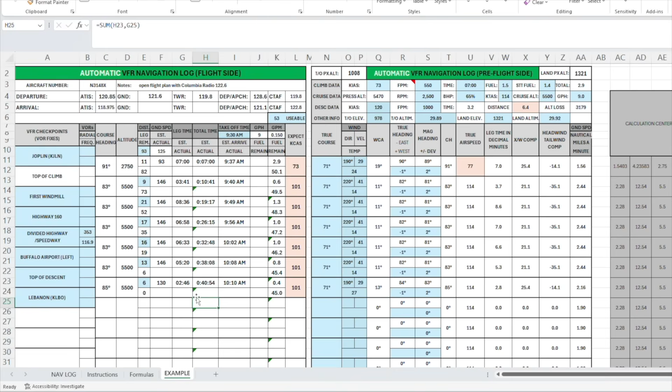Then we have the example tab, and this is actually the finished product from the NAVLOG I'm building in this video. So if you need something to look at, you can come over to this tab and see how I filled mine out.

Now, before I get started filling this out, you're going to notice that I color-coded a few things for you. The blue areas are things that must be filled out, and the white cells are things that will automatically be calculated for you.

There are a few white cells that'll be empty. Some of these are for your personal notes. I know a lot of pilots like a spot for their radio frequencies, so I threw a couple cells up here for those, and then the rest of the blank spaces down here are for your in-flight calculations.

Now, if you're wondering what these peach cells indicate, these are cells you should calculate if you have time, but the automatic calculations provided will get you really close.

For example, your expected calibrated airspeed should really be calculated with a flight computer. But these cells will estimate your calibrated airspeed based on the assumption that true airspeed increases 2% every 1,000 feet of altitude increase. This isn't a perfect calculation, but it's pretty close when you're operating at a lower altitude.

Okay, before we start filling this out, we need to plot our course, so let's go ahead and do that really quick. Today, I'm going to be flying from Joplin Regional, which is KJLN, over to Floyd Jones, which is in Lebanon, Missouri. That's KLBO.

So I'll start by drawing a line between these two airfields. This is what we call plotting our course, and after I do that, I'll use my plotter to determine my true course for this entire trip. I'm getting a true course of 071, or 71 degrees.

Now, because this route is a straight line the whole way, I can just throw that in my NAVLOG here. I'll put it up here on the first waypoint for now, though, because I don't know how many waypoints I have yet. Next, I'll pick some VFR waypoints that are roughly 20 miles apart.

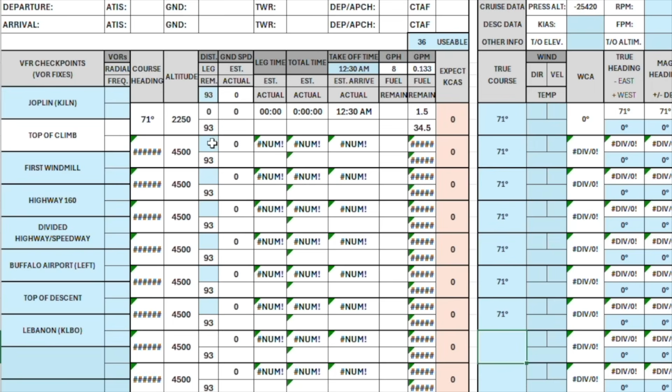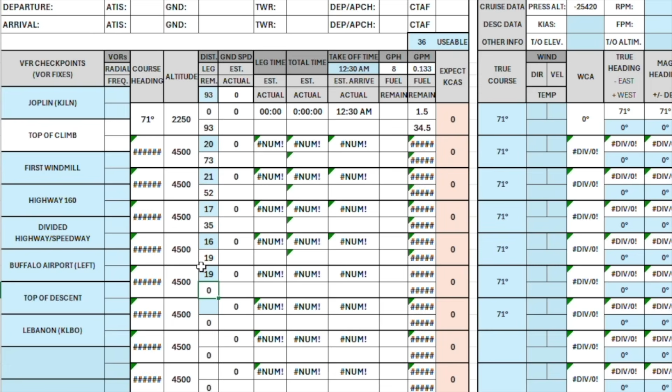I know my first leg is 20 miles, my second leg is 21, the next one is 17, then we have 16, and then our last leg is 19 miles. So I'll go ahead and throw that in here. Keep in mind, we don't know our top of descent yet, so we'll just skip that for now. Now, this sheet adds up these individual distances for you and puts the total down at the bottom of the sheet. So if you're off by more than a mile or two, you might want to remeasure your legs.

Before I move on, I do want to point out that this spreadsheet does have a place for VOR radials and frequencies if you want to use a VOR for one of your waypoints. In fact, if we pull out our map, you can see that our divided highway could be replaced by the 353 radial off of the Springfield Vortac. So I'll throw that frequency of 116.9 in here, and my 353 radial up here in case I want to test out my VOR skills during this flight.

Next, let's grab our performance calculations. Up here at the top of the pre-flight side of our NAVLOG, we've got some blue cells we need to fill in. First, we need the elevation of our takeoff field. According to our chart, it's 978 feet MSL. So let's throw that in here.

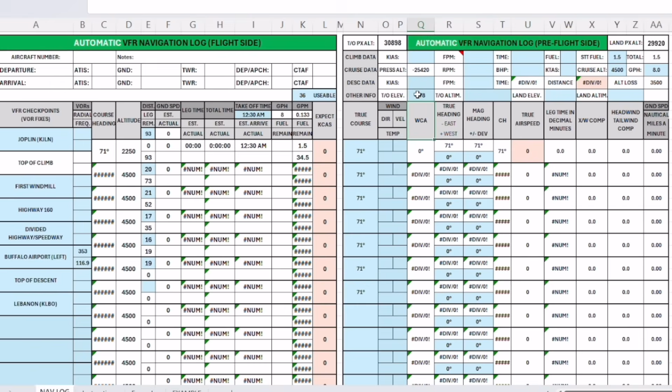Next, we have the altimeter setting at our takeoff field. Let's say we're making this trip as soon as we're done here. In that case, I'll just grab the METAR from aviationweather.gov. It looks like our altimeter setting is 29.9, so I'll throw that in right here.

Then the elevation at our destination is 1,321 feet. So we'll jump back over to the NAVLOG and throw that in here. The current altimeter setting at LBO is 29.9, so we'll throw that in here. And now that we've done that, our spreadsheet has calculated the pressure altitude at both locations.

Now we need to decide something. At what altitude do we want to fly? Anytime we fly above 3,000 feet AGL, we need to fly the proper VFR altitude. If we're flying a magnetic course of 360 to 179, we're on the east side of the compass, we need to fly an odd altitude plus 500 feet. If we're flying a mag course of 180 to 359, the west side of the compass, then we need to fly an even altitude plus 500 feet.

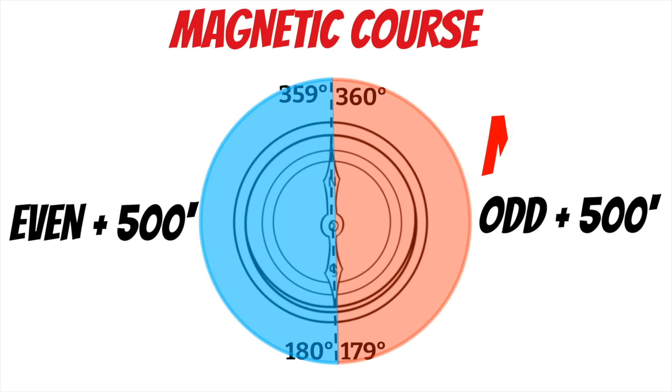I like to tell people that northeast is odd and southwest is even. So you've got ne-odd and sw-even.

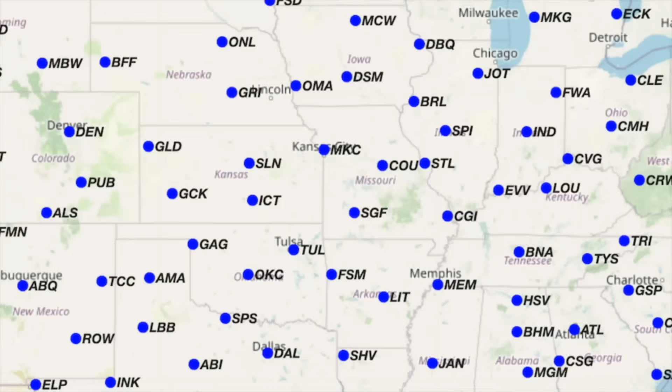This Winds Aloft chart comes from aviationweather.gov, and if you use it, you have to make sure you're using the closest sensor to your route of flight. Thankfully for this trip, Springfield is right in the middle of these two airfields, so I'll find SGF on the chart and grab the wind data for the 6,000 foot column since it's closest to our cruise altitude of 5,500 feet. Looks like our cruise winds are 220 at 41, with a temperature at altitude of 14 degrees Celsius.

Now that we know that, we can come over to our spreadsheet and throw these winds and temps into our blue wind blocks. To make things a little more accurate, I'm just going to put these in the cruise legs for now, not the climb and descent leg.

Once that's done, I like to go back to the Winds Aloft chart and pick a wind column that's about half our cruise altitude for the climb and descent legs. At 3,000 feet MSL, we've got winds that are 190 at 29, and the 3,000 foot column doesn't give us temperatures, so we'll just assume the temperature is the same as the surface to make things easier. We could calculate it, but it won't make much difference for this situation.

Now let's get the rest of the performance information. To fill out this section, we need the Pilot's Operating Handbook for our airplane, or the POH. If your airplane doesn't have one, you need the Airplane Flight Manual. Today I'll be flying a Cessna 172 Sierra, so these charts might look a little different than the plane you're in, but this NAVLOG should still work for you. On newer POHs, the performance information is going to be in section 5, but for older airplanes, who knows? It's going to be wherever the manufacturer felt like putting it.

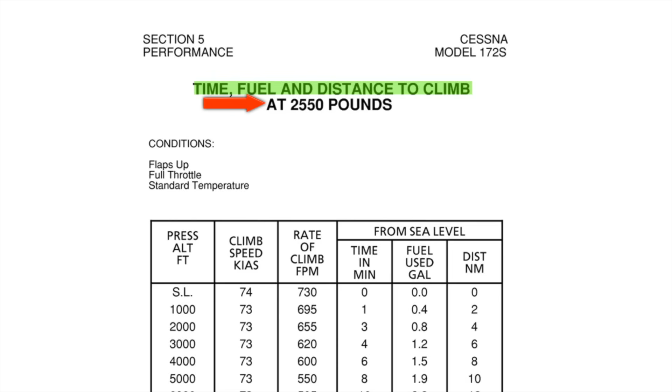Let's start with our climb data. For NAVLOG purposes, you want to find the chart labeled time, fuel, and distance to climb. Some POHs give you charts at different weights, but this one only gives climb data at your maximum weight, so these numbers are actually going to be slightly off, but they're conservative.

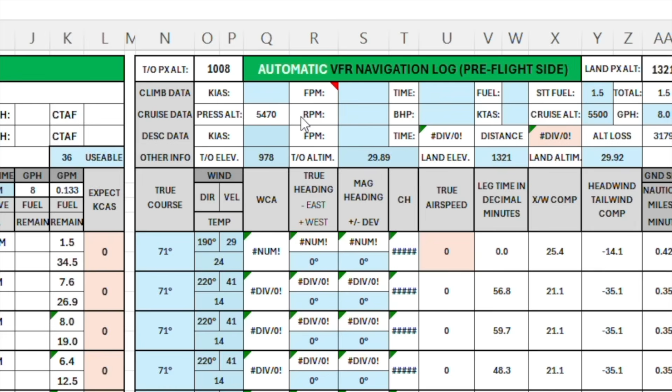Now this chart is a little weird. To properly calculate climb data, we need to know the pressure altitude for the altitude we're going to be cruising at, not the actual cruising altitude. Normally you'd have to calculate this, but because we put our cruise altitude and altimeter setting into the pre-flight side of our NAVLOG, my spreadsheet has already calculated this for us. It looks like our pressure altitude at cruise is going to be 5,470 feet.

If we look back at our chart, you can see we've got data for a 5,000 foot and a 6,000 foot pressure altitude. You could interpolate this data, but I'm just going to round down to 5,000 feet for today. So it looks like we're going to be climbing at 73 knots indicated airspeed, and we'll be climbing at a rate of 550 feet per minute. Let's come back over to our NAVLOG and throw that information in up here.

Now, before we fill in the time and fuel information, I want to show you something. Unfortunately, the climb information in these lines is for a climb from sea level up to our pressure altitude. A lot of people will just use this information directly, but what I like to do is take the information from my cruise altitude and subtract the information from the pressure altitude at my takeoff field.

Let's see here, our NAVLOG calculated that at 1,008 feet. So let's go back over to our climb chart. From sea level to 5,000 feet, it would take us 8 minutes, but we started at a pressure altitude of 1,000 feet, so we basically saved 1 minute in the climb. So our total climb time should be 7 minutes. Let's go ahead and throw that in the NAVLOG over here.

Now, one thing I do want to mention is that Microsoft products are extremely stupid. For some reason, the only way I can get this cell to take the correct time is to input the time in an hour, minute, and second format. So let's type in 00:07:00 into this cell. Now let's grab our fuel.

I'm showing 1.9 gallons for the climb up to 5,000 feet, and we saved 0.4 by starting out at 1,000 feet, so let's call our climb fuel 1.5 gallons.

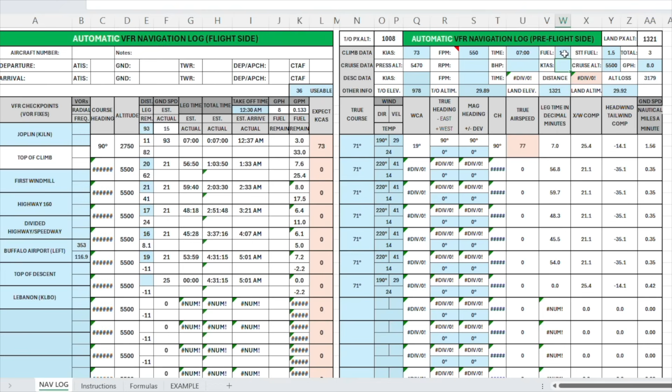We'll go ahead and throw that into our Excel sheet. In case you didn't know, you burn quite a bit of fuel when you start the engine, when you taxi, and during takeoff. 1.5 gallons is pretty conservative for most trainer planes, but a lot of POHs will actually give you a start, taxi, and takeoff fuel number.

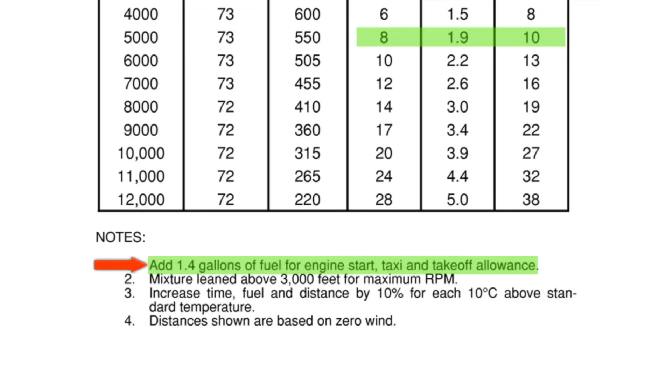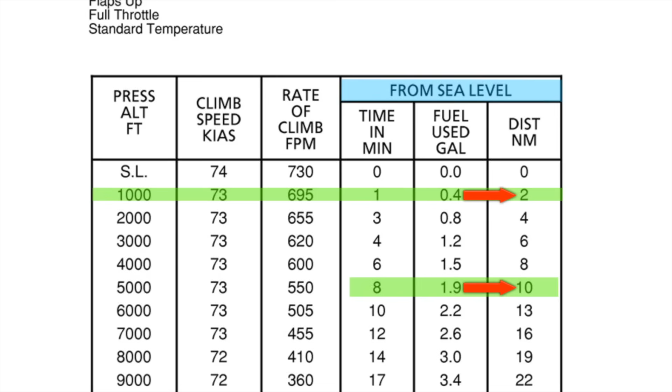Looks like for this plane it's 1.4 gallons, so let's adjust this number real quick. Now this chart does give you a distance to climb, but this assumes zero wind, so it isn't really accurate if there's any wind at all. If you wanted to find your zero wind climb distance, you could subtract the takeoff pressure altitude information from the cruise pressure altitude information to get a rough estimate.

But don't worry about doing that, because this NAVLOG takes the wind and calculates the distance for you. I don't have a block up here for that, it automatically populates this white distance cell on the flight side of the NAVLOG. Now that we know our climb distance, we can subtract it from the distance we measured on the first leg, since our climb distance is on the way to our first waypoint. Let's see, 20 minus 11 is 9, so I'll throw that in here from our top of climb to the windmill.

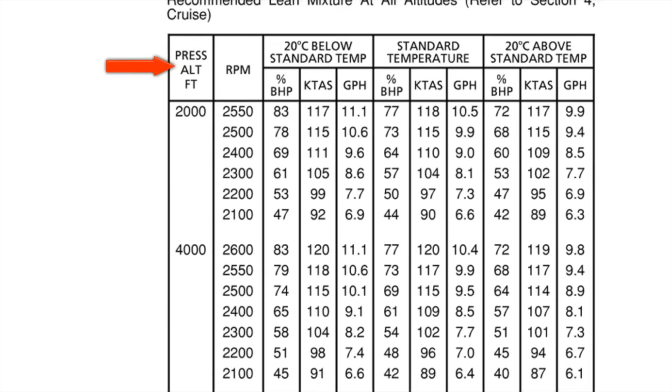Next, let's grab the cruise data. Once again, in newer POHs that's going to be in section 5. Just like the climb chart, this chart uses our pressure altitude, which we know is 5,470 feet, so let's just use a 6,000 foot chart today. We could interpolate, but I'm feeling lazy.

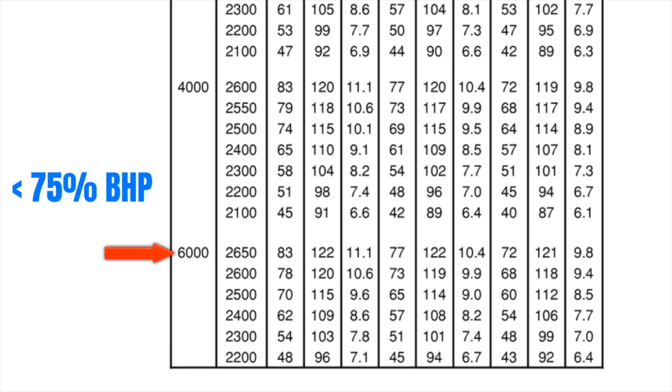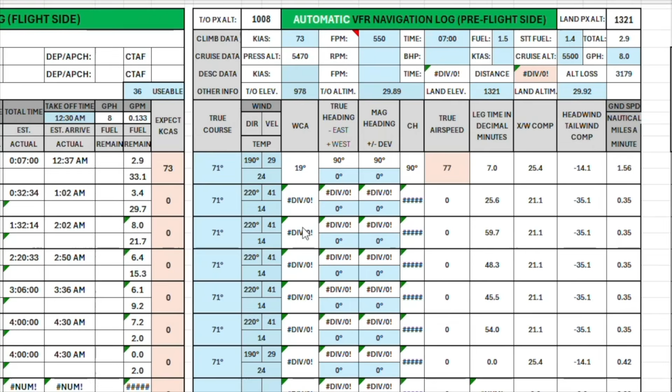To make your aircraft engine last as long as possible, it's best to keep the power below 75% during cruise, so let's pick something below 75% brake horsepower. But this is where things can get a little confusing, as you can see we have 3 different temperature ranges. We know our temperature at cruise is going to be 14 degrees Celsius, because we put that in our NAVLOG when we got the Winds Aloft.

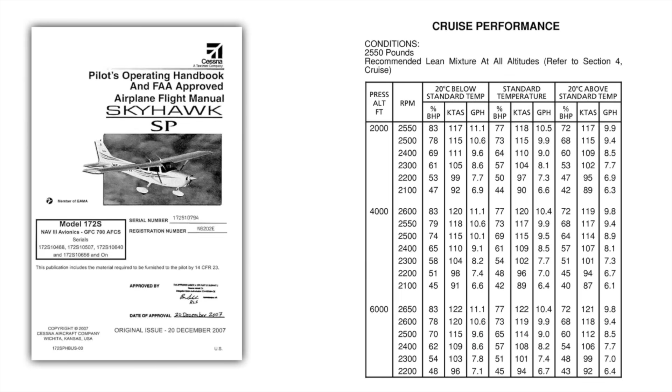You probably already know standard temperature is 15 degrees Celsius, but 15 isn't actually standard at 5,500 feet. The temperature drops 2 degrees Celsius every 1,000 feet, so standard temperature up here is going to be closer to 4 or 5 degrees. We're still pretty close to standard at 14 degrees though, so I'm going to go ahead and use this block.

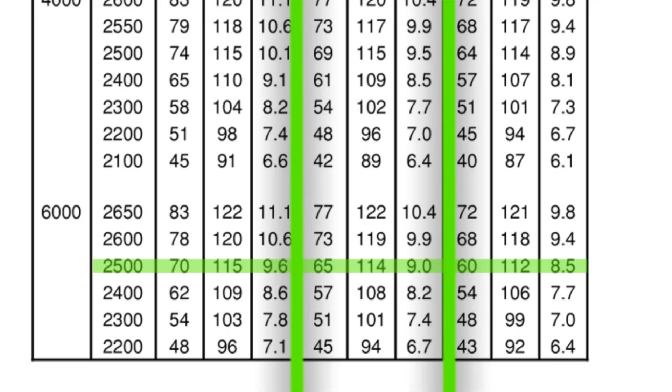It looks like 2,500 RPM keeps us below 75% brake horsepower, and we still seem to be getting a pretty decent cruise speed of 114 knots true. So let's use this information here, and it looks like we're going to be burning exactly 9 gallons per hour if we use this setting.

Okay, so let's go back over to the pre-flight side of our NAVLOG and throw in 2,500 RPM, our brake horsepower of 65%, and our true airspeed of 114 knots. And then we'll throw in our fuel burn of 9 gallons per hour.

Now, before we're done with the fuel, make sure you update the usable fuel over here on the flight side of your NAVLOG. This plane has a usable fuel capacity of 53 gallons, and this needs to be accurate so our NAVLOG can calculate everything properly.

All right, let's go back and find a few more numbers. Next we need to find our variation and our deviation. To find the variation, we need to look back at our chart to see which lines of variation are running through our course. For the entire course, I'm only seeing one line of variation, right by our second point, and it's showing 1 degree east.

Now, most of you remember the old saying, east is least and west is best. This is an easy way to remember whether you should add or subtract the variation. But if you come over to the spreadsheet, you'll notice I make it dummy-proof by telling you what to do at the top of the block: minus or subtract east, and add west. Okay, so I had 1 degree east, so let's throw a -1 in all these cells.

To find the deviation, you need the compass correction card from your airplane. If you don't have it or don't know where it is, you can leave this at 0, and you know your course is going to be off a couple degrees. But if you know your compass corrections, I'll show you how to use it really quick. Now to use this, we need to know our magnetic heading, which our NAVLOG has already calculated for us.

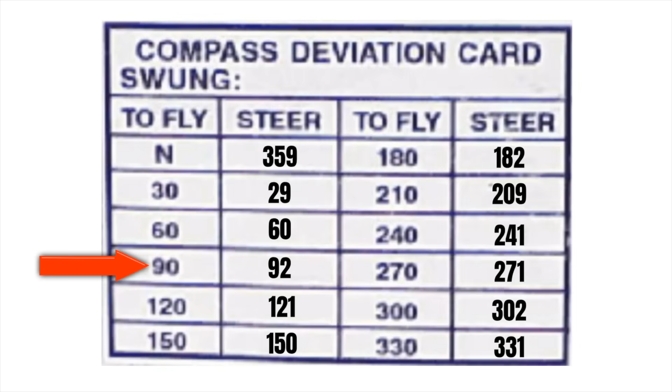And unfortunately, we have to do a little bit of math. So go ahead and start taking your shoes off. 090 is the closest heading to the headings on our NAVLOG. And this thing just says that we need to steer a 092 to correct for deviation. So we just need to add 2 degrees to all our magnetic headings to get a final course heading. Okay. So let's jump over to the NAVLOG and throw 2 degrees into all of these cells. If you needed to subtract, you could just put a negative in front of the number.

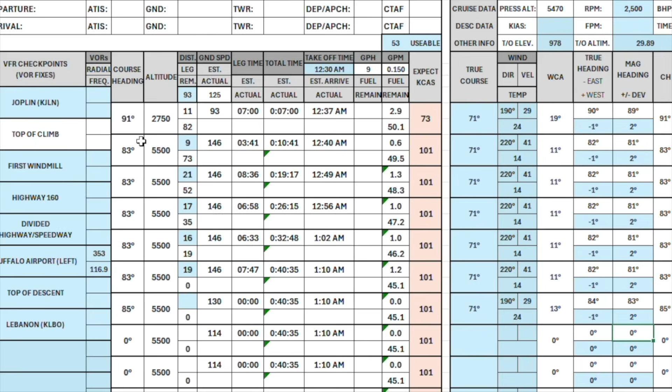Now that this is done, our NAVLOG has automatically calculated our course heading. And this is duplicated over here on the flight side of your sheet because this is actually what you're going to be using during flight. Looks like we'll be starting with a 091 heading, and then we'll end up on a 083 heading after the climb. Then, if you know your takeoff time, you can throw that in here if you want. I don't prefer using clock times in flight, but some people do, so that's there if you want it.

Now, a lot of NAVLOGs don't include descent data, but mine does, so let me show you how to use that real quick if you want to. For this, you're just going to be inputting your personal preferences. My spreadsheet says that I'm going to be cruising at an indicated airspeed of about 101 knots. So I think I'm going to descend with power, and I'll plan on speeding up to 120 for the descent at a rate of 1,000 feet per minute. According to my spreadsheet, if I do this, it will take me 3.2 minutes to descend, and I can do it in about 6.4 miles.

Let's round down to 6, and we'll throw that over on the flight side of the NAVLOG. Let's see, it'll take me 6 miles to descend, so I'll subtract 6 from 19 to get 13 on the previous leg up here. And if I did everything right, my distances should zero out. Now, back over here on the pre-flight side of my sheet, you might be wondering what this altitude loss block is telling us. This is just letting you know how much altitude you need to lose to get down to pattern altitude. This can be really handy if you have a long descent.

Once again, I want to mention these peach cells. If you have time, go ahead and use a flight computer to get these calibrated airspeeds if you want. You might also want to calculate your true airspeed during the climb if you need things to be even more precise. At this point, our NAVLOG is basically done, but before we use it, let's go ahead and clean it up a little bit so it's easier to read in flight. I'll throw my N number in here, maybe a few notes, and then I'll throw in my frequencies.

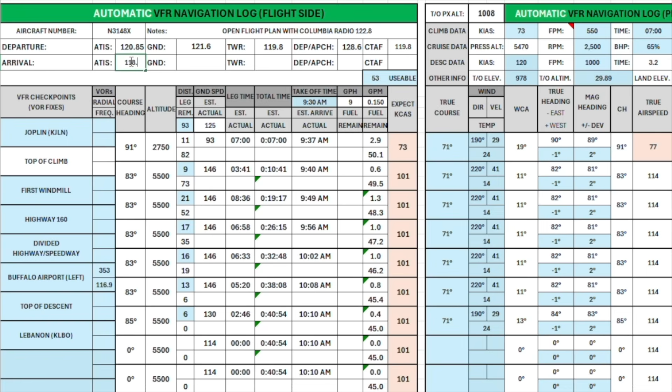And once I'm done with all that, I'm going to clean up the bottom of my NAVLOG on the flight side. I don't really care about the pre-flight side. I'm not going to be using that in flight. But to clean up this flight side, I can just turn all these unused cells white and make the words white as well. You can even do that over here if you want, but that's all you need to do. Now I'll just print it out and I'll show you guys what the completed product looks like.

Okay, now that I've got this guy printed out, let's just fold it over like so, and it's basically ready to use. And then we could just throw it on our kneeboard and use it in flight. And I'll explain how to do that just really briefly. First of all, timing is key here. If you forget to start your clock on takeoff, you're basically screwing yourself over when you do this. So don't forget to hack the clock.

Now, after you take off, do all the things you normally would do. Normally, you're going to fly straight ahead for a couple of miles before you can turn on course. I like to estimate about 2 to 5 miles, depending on what type of airfield I'm operating at. But to get yourself on your course, you need to do something. I like to tell students that they need to pick out some kind of waypoint to fly over before they can start flying their course headings. Well, looky there.

There's a nice big town I can fly right next to on this map. In fact, it's exactly 9 miles from my airport. So if I drive out 2 miles and then turn towards that town, I'm going to be at my cruise altitude right there because it's supposed to take me 11 miles to get up to cruise. That's why I like to mark the top of climb on my chart. It makes things kind of handy.

Now, when you hit your cruise altitude, you can go ahead and throw in your times and stuff in here, and then you can calculate your ground speed if you want. But I've found that the climb isn't always super accurate for ground speed calculations because we don't always know how a towered airport is going to have you depart the pattern. But I'll go ahead and throw in my time in here when I reach my cruise.

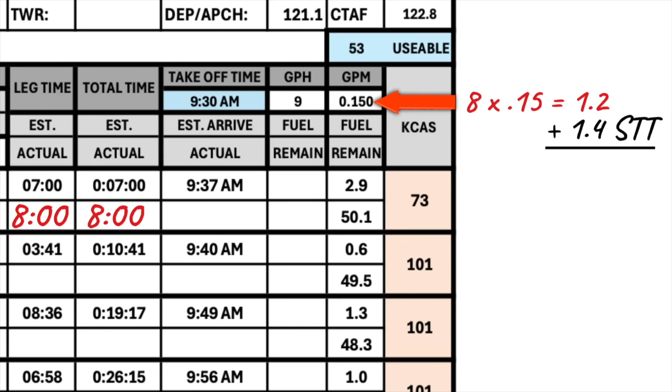And let's see. If I'm burning 9 gallons per hour, I could pull out my flight computer if I want. But the easier thing to do is to look up here in this cell and see that I'm burning 0.15 gallons per minute. That number is automatically calculated by the NAVLOG from 9 gallons per hour. So I can just take that number and multiply it times 8 to get a total of 1.2 gallons. And if we added our start, taxi, and takeoff fuel to this, that would put us at 2.6 gallons. So I'll throw that in over here.

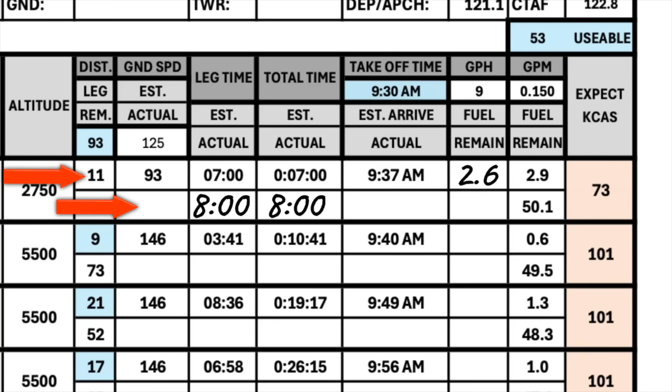I know it doesn't do us much good, but let's go ahead and calculate the ground speed for the climb. For this, let's just stick to our climb distance of 11 miles. This isn't going to be super accurate during the climb unless you're climbing straight out the entire time, but it should be fairly close. Let's see, if we travel 11 miles in 8 minutes, we can divide 11 miles by 8 minutes to get a ground speed of 1.375 nautical miles per minute. Then you can multiply that times 60 to get a ground speed of roughly 83 knots. So let's go ahead and put that in our NAVLOG.

Throughout your flight, you're going to be doing this with every leg. And what we're trying to do here is we're trying to figure out time, distance, and fuel. And fuel is the most important thing here. Do we have enough fuel to reach our destination? Let's say I just passed my divided highway with the speedway on the left. So far this trip has taken us over 33 minutes when it should have taken just over 26. Do we have enough fuel? According to my pre-flight planning, I should have 47.2 gallons of fuel remaining. But based on my in-flight calculations, I have 47.4. And I know this isn't really a big difference, but you should always be double checking to make sure you're going to make it. According to our log, we have 35 miles remaining on our trip.

So if I calculate my ground speed at 145 knots, and I convert that to nautical miles per minute by dividing 145 knots by 60, I can then divide my distance by my ground speed of 2.4 nautical miles per minute to figure out that I have 14.6 minutes to go. At 0.15 gallons per minute, that puts us at 2.2 gallons needed to reach our destination. So if I subtract that from my current fuel on board, you can see that we're going to be just fine when we land. And we'll even have the proper 30 minutes of fuel reserves.